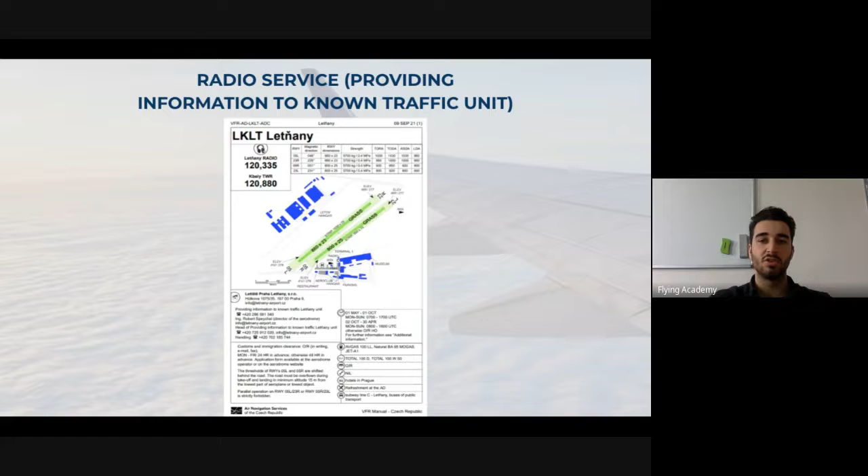The radio service, which is providing information to known traffic unit, is this one: Letnany radio. So what happens? We are in an aerodrome, and this is the aerodrome chart, the configuration of the aerodrome. On top left of the map of the aerodrome chart, you have the frequency, called Letnany radio, and the frequency value is 120.335.

Instead, when we are talking about information service, they are called Kunovice Info, for example. Kunovice is the proper name of the aerodrome, but Info is the information service. It means that they are equipped with a meteorological station. This currently, Lima Kilo Kilo Uniform, which is indicated here, is the only one present in our country so far, and no other information service is provided. Most of them are all radio.

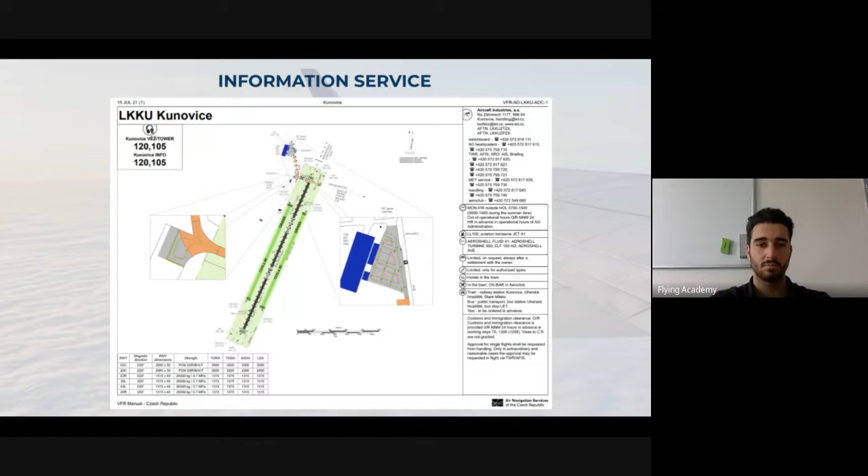So we can try to practice, okay?

Here, guys, we will start to a little bit understand how the communication is established in an uncontrolled aerodrome. We start from the first contact, which we require, and then we will go ahead going over basically all the rest, such as taxiing, so we request to taxi. Then we will see how do we cross a runway. Then we will see after landing, how do we taxi out of the runway, and what are the standard phraseologies. Then we will see how to backtrack a runway. So many types of operation will be faced in this class. For now, let's stick to the basics first.

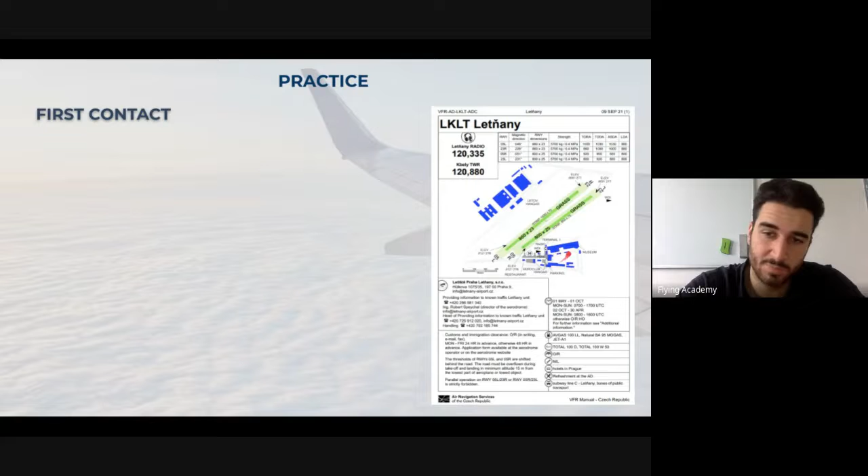So the first thing that we have to do is establish our first contact. Imagine, guys, we are somewhere parked with our aircraft in this aerodrome, and we have to establish our first contact. So what are we going to establish? What are we going to say?

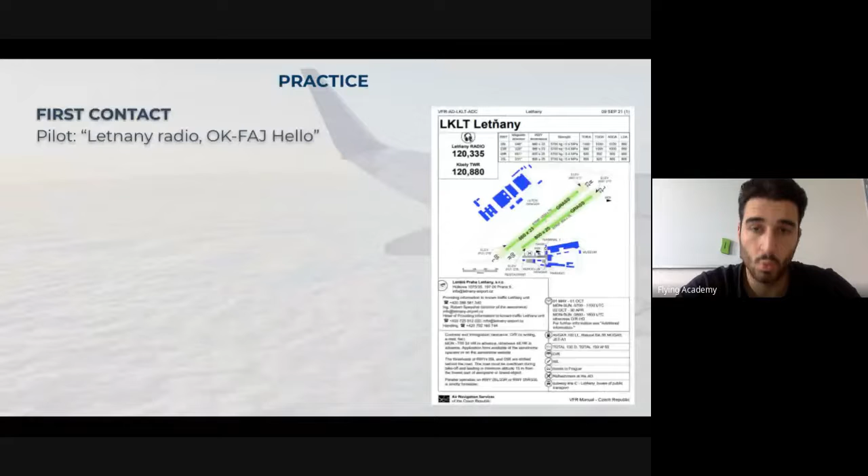First of all, we have to report to the unit which is called Letnany radio, in this case. We have to say who we are calling, who we are, and then establish hello or good day. So we report, we say politely hello. Why? Because we are preparing them that we are going to transmit them a message. Usually, we do not jump into the communication straight saying what we need to say. We first, at the first contact, say politely good day or hello, so we can prepare them.

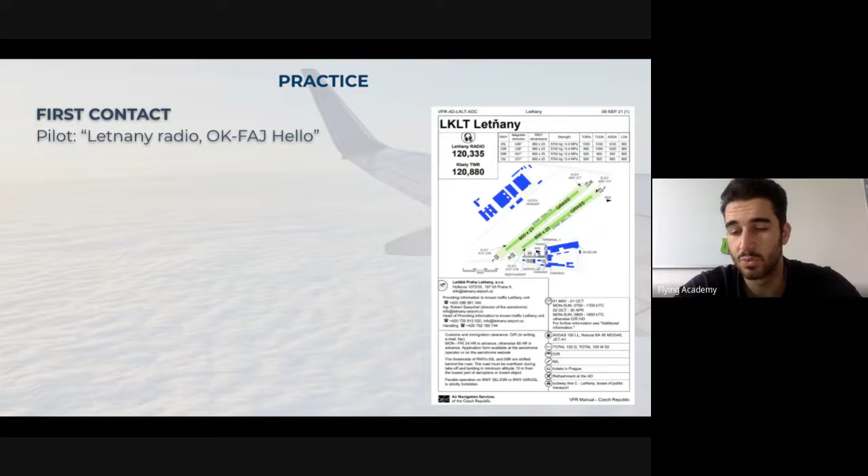The controller will tell you hello back, and he will let you pass your message. So he will tell you, pass your message. He knows you have to transmit something, but what? He still doesn't know, so you will have to report it to him.

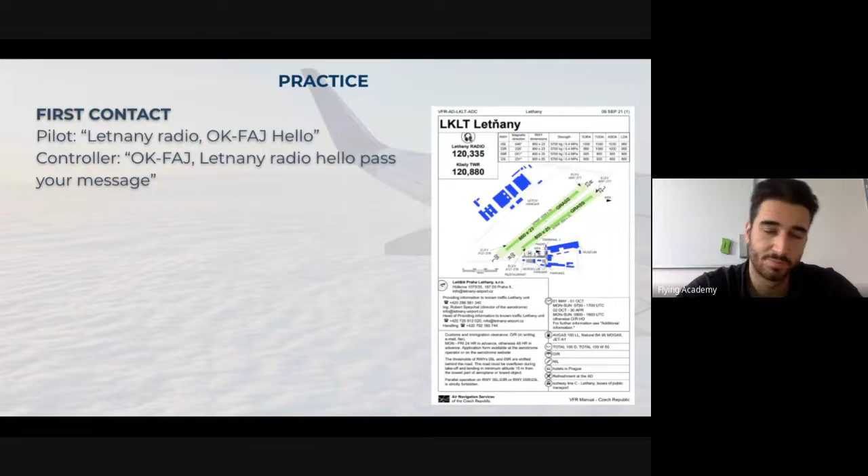So what are we gonna say? Pilot will say: Cessna 152, close to refueling station, 2 persons on board, pilot in command, the name of the pilot in command, and then request departure information via Mike point. So what's happening in this circumstance?

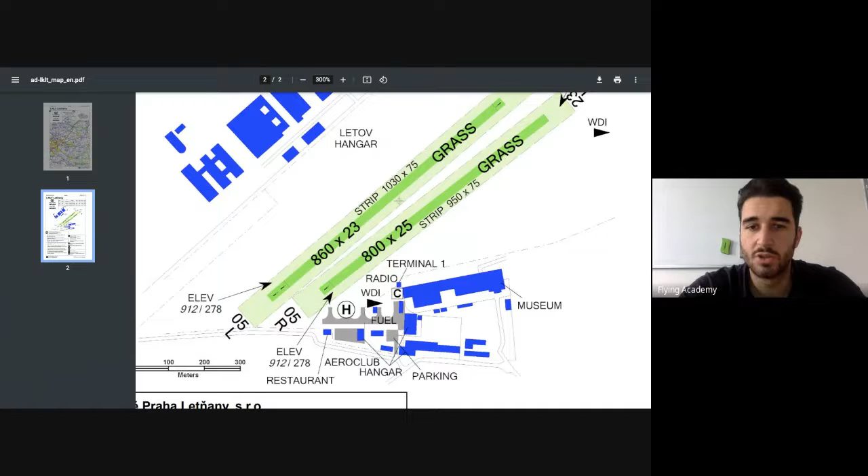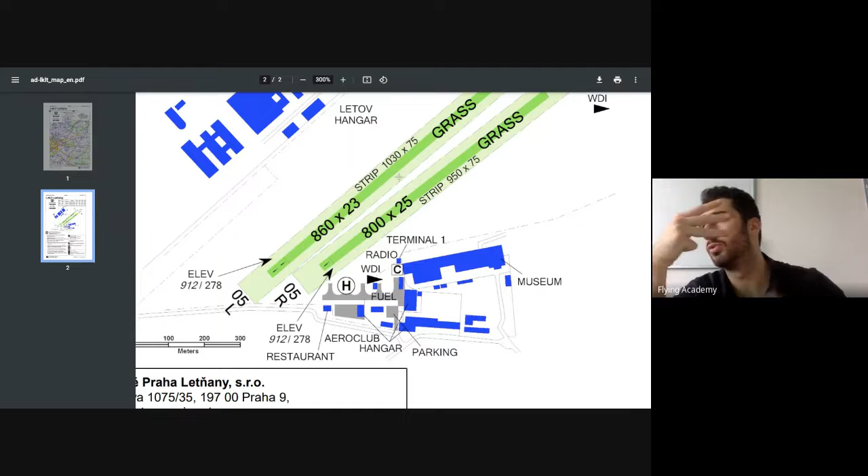So what's happening here? We are reporting, first of all, hello, and then we say Cessna 152, so always the 3W rule: who we are, what we want, correction, where we are, and what we want. So 3W rule, guys, remember it always.

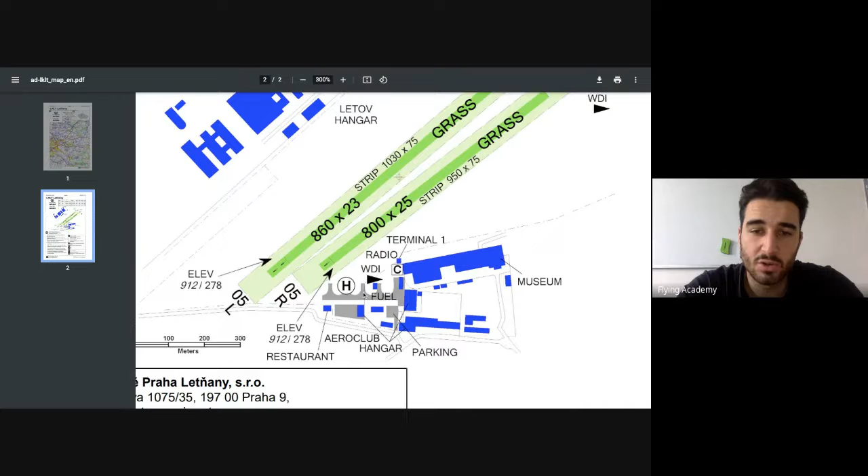So, what do I report? Let's say I'm here, close to the refueling station. I am located here on the paved side. The gray part is the paved side. And then here you have the 2 runways, 05 right and 05 left, or 23 left and 23 right. Here you have the terminal, then the tower, and then some other buildings that are around the aerodrome.

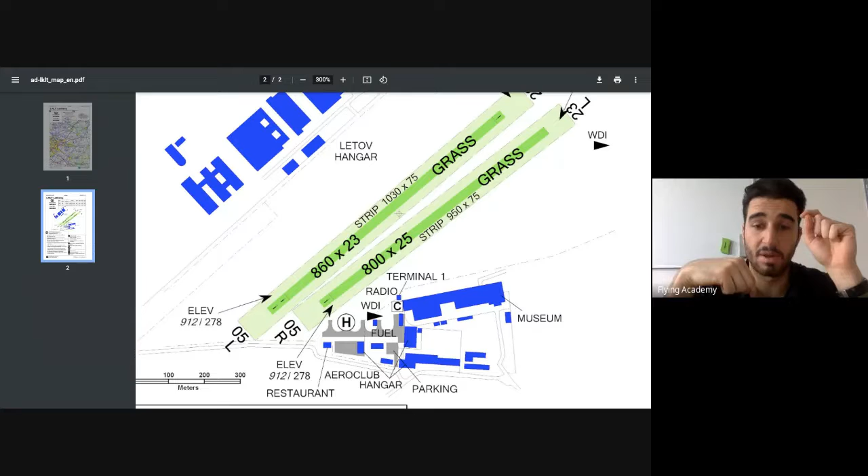So now what happens? You report who you are, Cessna 152 in this position, 2 persons on board, pilot in command, and you will have to say the name of the pilot in command. What does this mean? That you are reporting who you are. So, I'm a Cessna 152, that's my type of aircraft. I have 2 persons on board, it means that it's me, the pilot in command, plus someone else. And third, the name of the pilot in command.

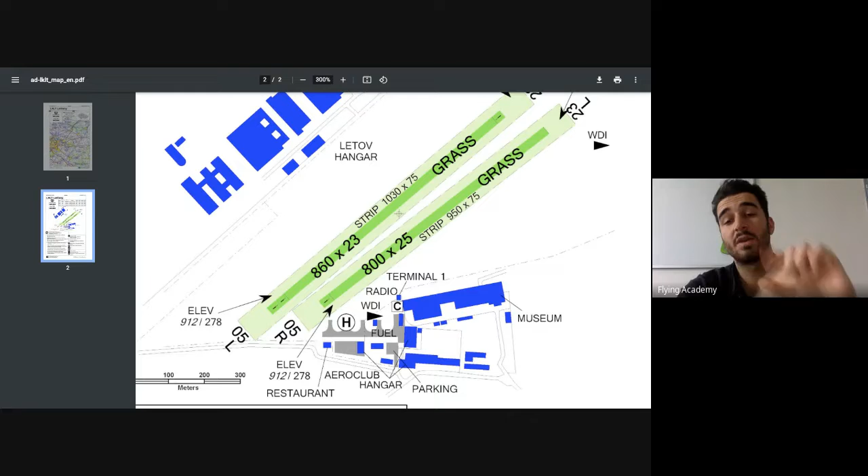So, the name of the pilot in command has to be usually spelled in ICAO alphabet. So, for example, Mayank, can you please spell in ICAO alphabet your name?

You can unmute yourself if you want. Yeah, so Mike Alpha, Yankee Alpha, November Kilo. Okay, very good.

Deksha, can you spell your name? Delta Echo Kilo... Sierra... then Hotel Alpha. Very good, amazing.

You are already guys familiar with the ICAO alphabet. I'm really happy about that. Very good. Muhafiz, can you do the same, please? Yeah.

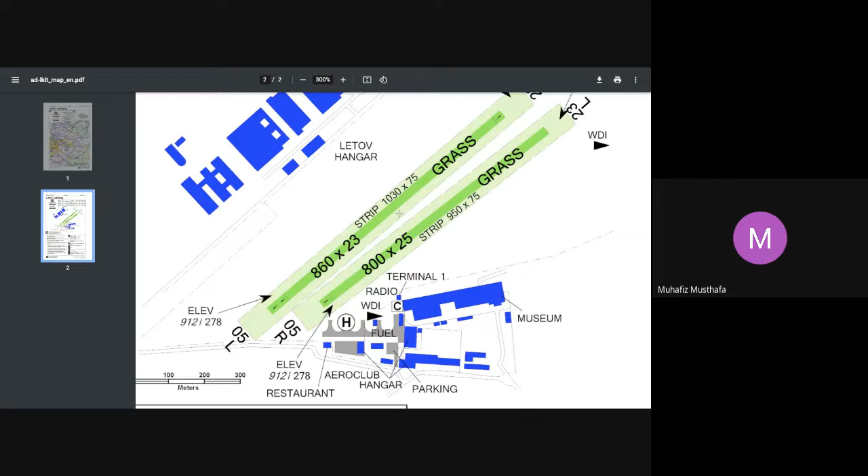Mike Uniform Hotel Alpha Foxtrot India Zulu. Very good, amazing. Okay, guys, that's already a big step. The first thing that you have to do before starting flying: get familiar with this alphabet.

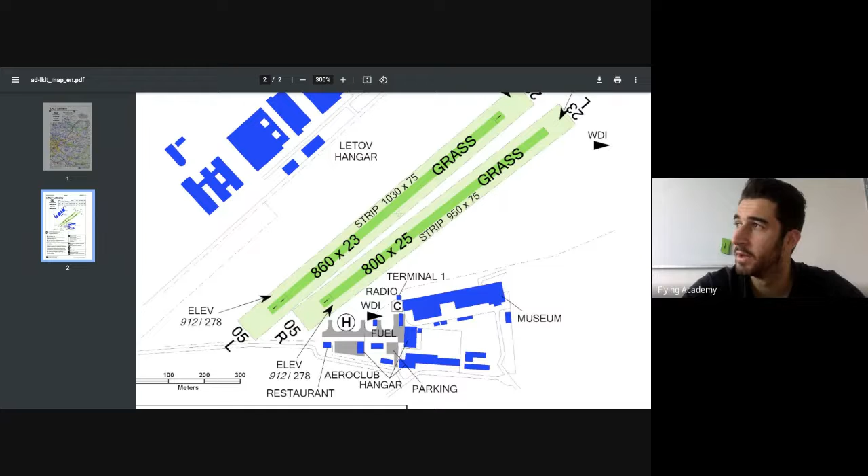Sometimes, maybe you will not fly in the same country you come from, and the controller will not understand your name. It's normal; it happened to me very often. As they do not understand your name, they ask you, can you please spell the name of the pilot in command? So you have to spell letter by letter, and in our case, we have to spell letter by letter in the ICAO alphabet, okay?

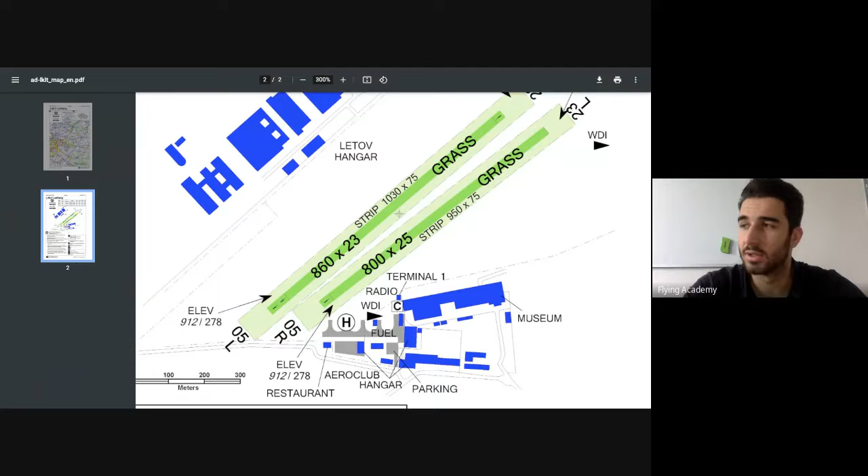Once you report the name of the pilot in command, you will state where you are. We are currently located close to the refueling station. And then we never have to forget: what do we want? Why are we calling these guys and establishing communication? Because we want to depart and leave this airspace from Mike Point in this case.

It means that they have to be aware that we want departure information, because we are in a radio uncontrolled aerodrome. So we want information for our departure via Mike Point, which is this point. Our aerodrome is here, this one. So what we will do is just take off and proceed to this Mike Point. That's our intention.

Okay, the controller now understood what we wanted and he's going to answer us. We requested the departure information, so he will give us the information we require. Oscar Kilo Foxtrot Alpha Juliet, Letňany Radio, runway in use 23, right-hand traffic circuit, not above 2,000 feet, QNH 1010.

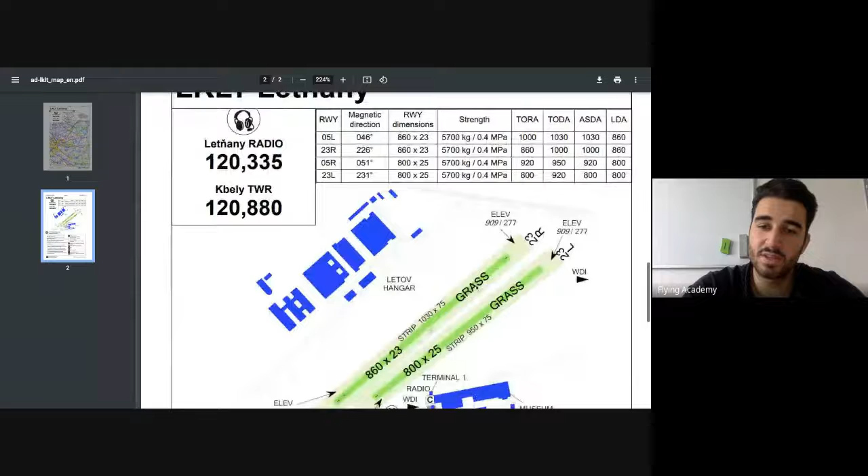So, what does this mean? First of all, runway in use is 23. It means that the wind is coming from the west, southwest. So the runway in use is 23, this one. It means that the pilot will have to taxi from this point all the way to the holding point of this runway, without entering yet, obviously.

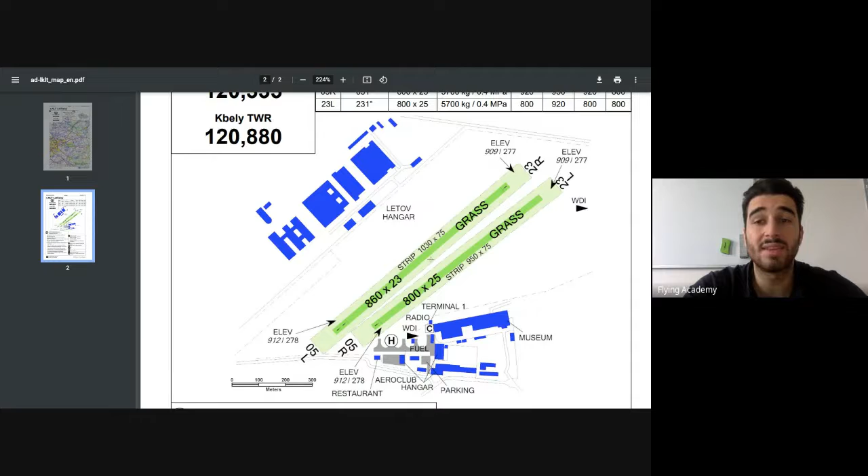Then it says right-hand traffic pattern. It means that if I want to stay on my traffic pattern, I have to take a right turn. If this is runway 23, I have to go to the right, so north of the airfield. And this is the direction of my traffic pattern. Understood?

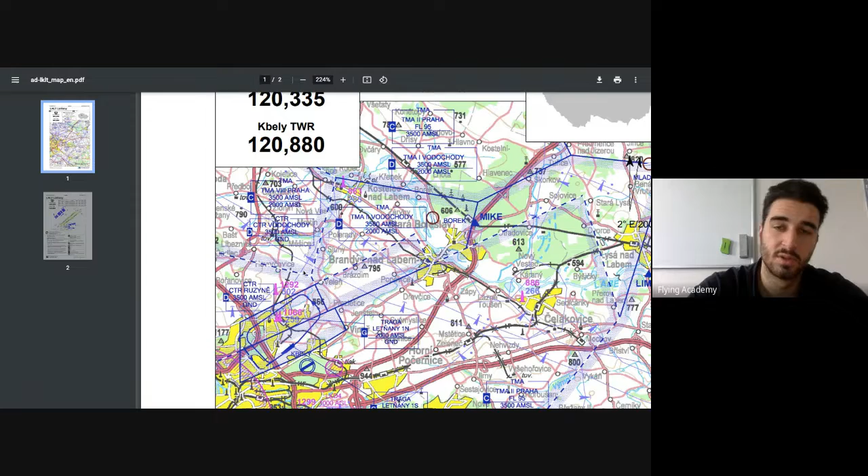Then it says do not climb above 2,000 feet, because above 2,000 feet there is another airspace which we cannot enter. And it also gives the QNH, which in this case is 1010. Okay?

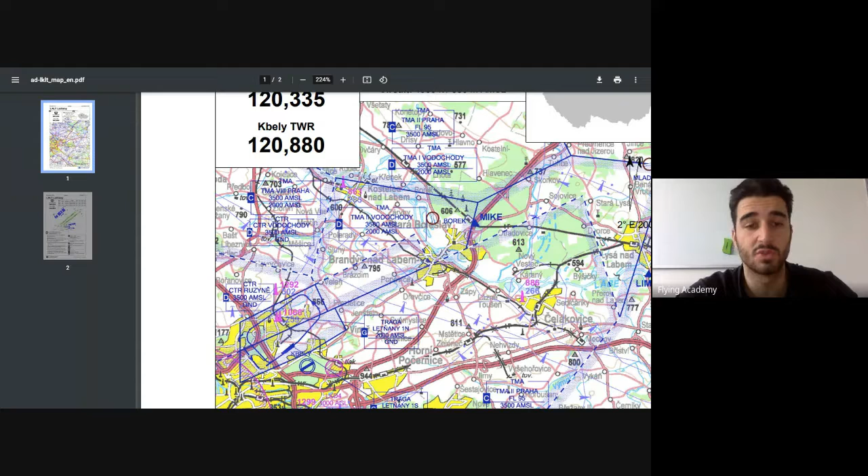Then the pilot, after he receives all this information, has to acknowledge it: runway in use 23, right-hand traffic circuit, not above 2,000 feet, QNH 1010. So he basically repeats everything that has been told to us. In aviation, guys, communication most of the time is just repeating what they are saying to you. Once you understand this, you will be a little more at ease with the communication procedures.

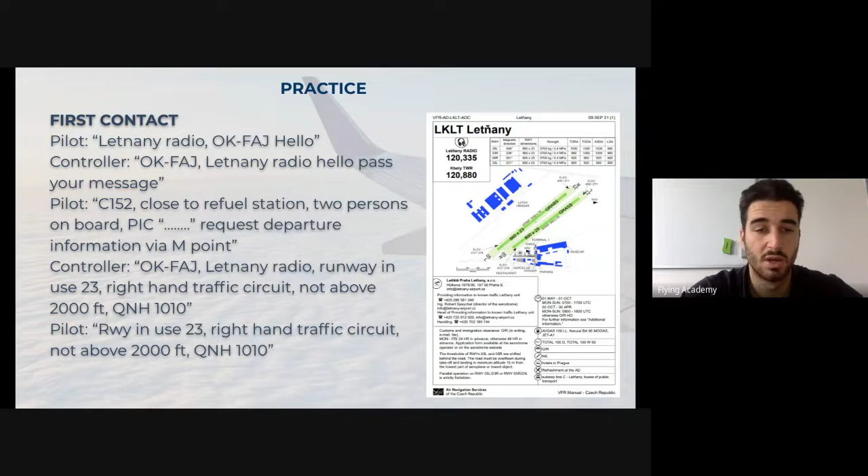Okay, understood until here, or do you have any question? Okay. So now it's time to practice. Taxi. The pilot, as we said, wants to taxi to runway 23. From this position, he wants to follow this arrow and reach runway 23 left.

Now, in some aerodromes, there is no taxi procedure published. What does this mean? That we do not have any taxi path defined on the aerodrome ground. In some others, we do, and I have some examples here. Just give me a second.

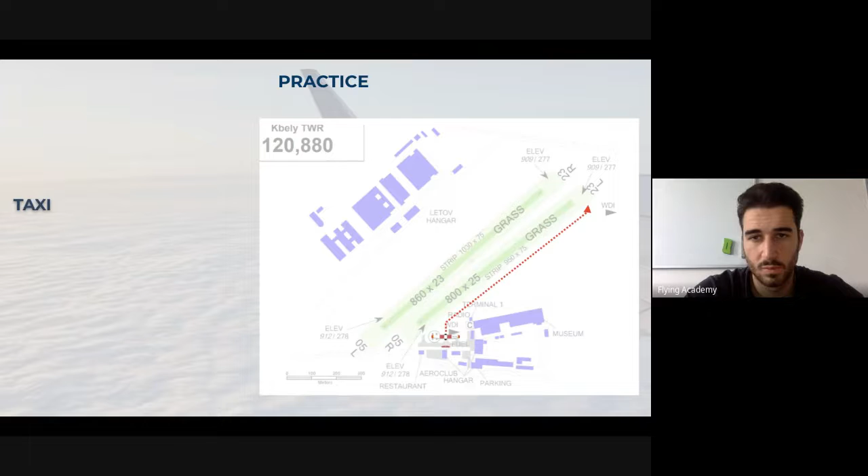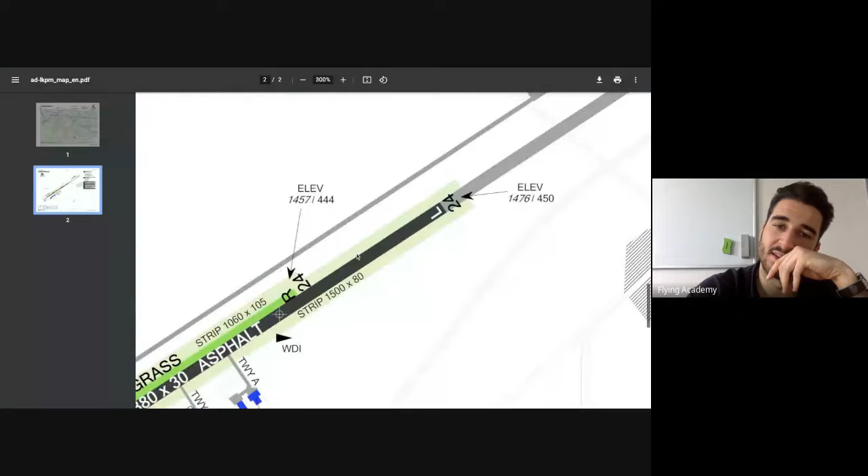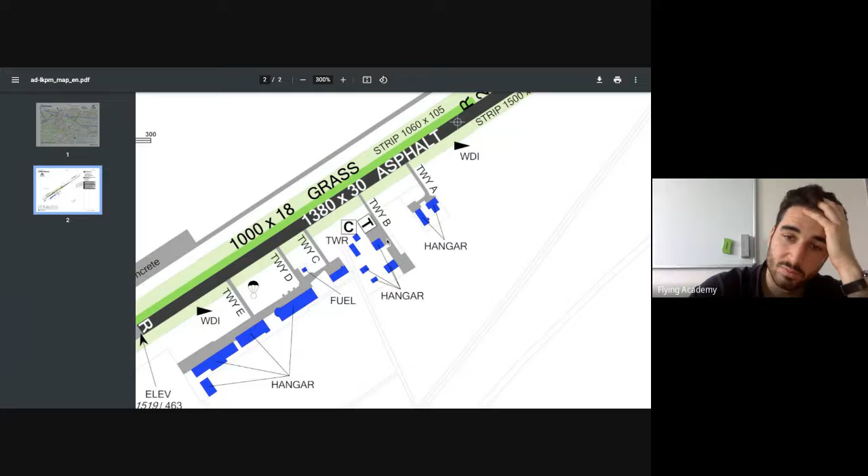So in this case, you see, guys, runway 06 R stands for right, and 24 L, L stands for left. This is the asphalt runway. Then we have the so-called taxiways. Taxiways have different names: Alpha, Bravo, Charlie, Delta, Echo. These are the taxiways, and they are defined paths.

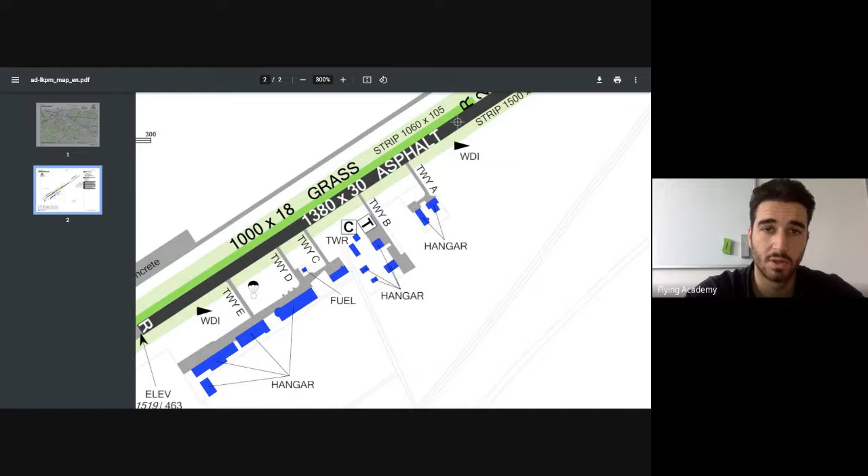The controller will just tell you either copied, Roger, or taxi is clear, meaning the taxiway is clear, there is no traffic and so on. The idea, guys, is that you're just informing them, but you're not requesting anything, because they do not have to give you any authorization. Imagine you are in a public park; no one has to give any authorization. However, it is good to tell them as information.

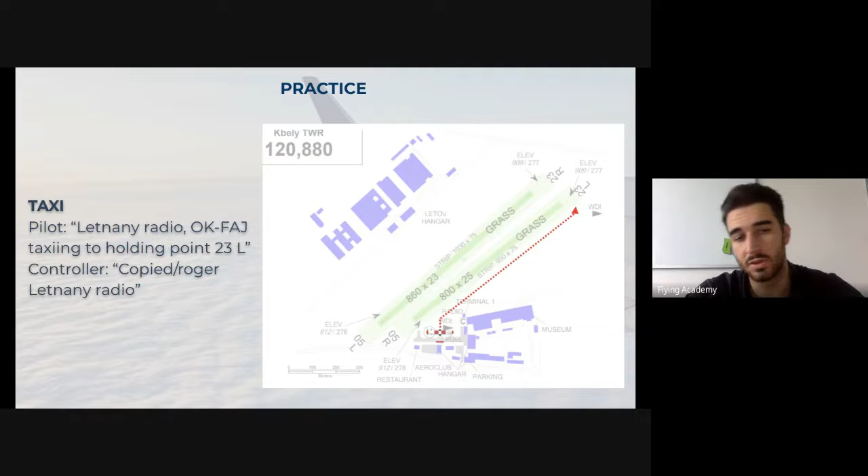In some aerodromes you do not even have to report that you're taxiing, because here no taxi procedure is published; there is no defined place to taxi on the aerodrome chart. However, it's a good habit to tell them that you are taxiing to 23 left. They will tell you, obviously, copied or Roger. Do you remember what Roger means?

Can anyone tell me what Roger means? Yeah, understood, exactly, okay? So, we are taxiing with our airplane to holding point 23, okay? And that's pretty much what happens. After that, we will just request the takeoff clearance. We will just inform them that we will take off, and we will just do the takeoff.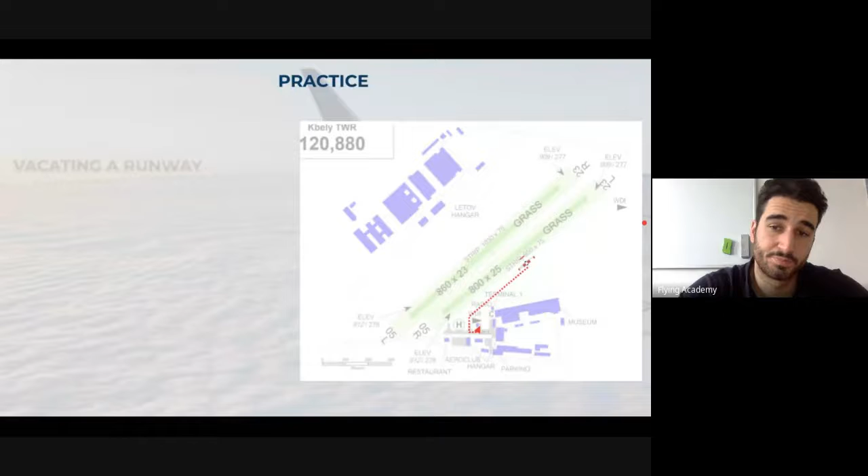Now, whenever we talk about taxi, guys, we are also talking about how to exit the runway, not only when we are going for our departure, but also when we are arriving from our flight, okay? So, whenever we say vacating the runway, it means exit the runway, okay? In an uncontrolled aerodrome, we have to report: Legnani Radio, Oscar Kilo Fox Alpha Juliet, runway 23 left vacated, taxiing to refueling station.

Okay? So we reported to them that the runway 23 left is vacated and that we are taxiing to the refueling station. It is important for you to understand, guys, that it is not mandatory to report the runway 23 left vacated during daytime as per European rule, but it is highly recommended. It is mandatory at night. At night, you have to report the runway vacated. Okay?

And obviously, you tell them taxiing to refueling station. So you are telling them what your intentions are. Okay? The controller will just tell you copied, bye-bye. Okay? Because at that point, guys, you don't need the controller anymore. You are taxiing to the refueling station, switching off the aircraft, and you will refuel the aircraft. But you do not really need the controller anymore for that, okay?

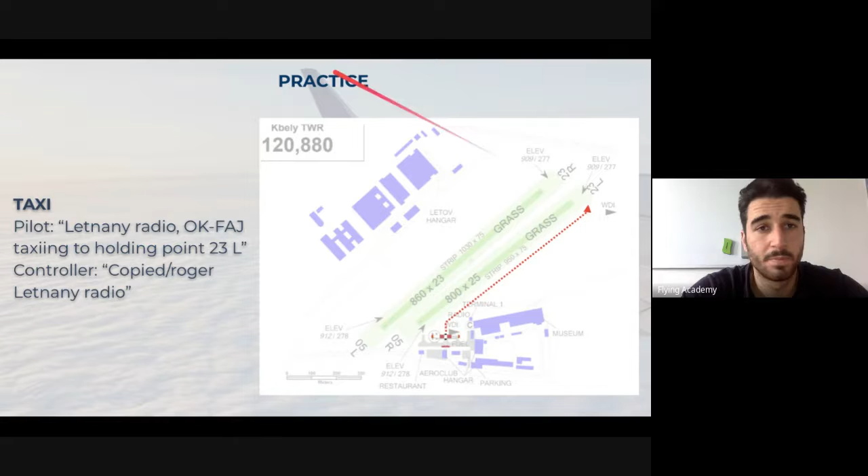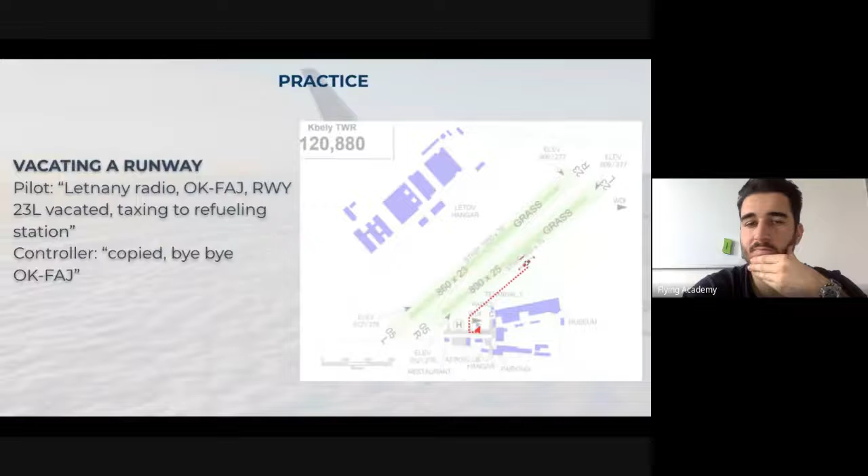What may happen? You may tell them, Letnany Radio, Oscar Kilo Fox Alpha Juliet, runway 23 left vacated, taxiing back to holding point runway 23 left. It means that from this position, okay, in which you vacated the runway, you are going all the way back to this position, okay? Where is the arrow? You see it? Good.

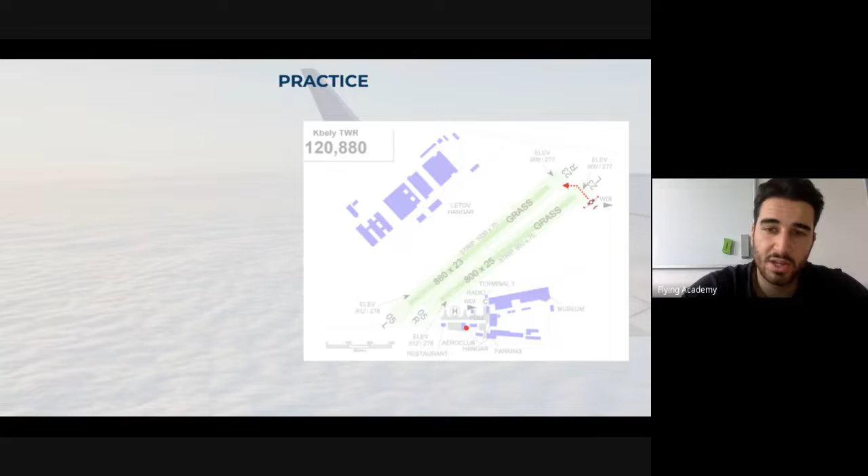So, in some aerodromes, guys, we have two runways, okay? It means that in this case, we have two runways, so 05 left, 05 right, or 23 left, 23 right. So what happens with these runways? If we are coming from here, for example, we were coming from the refueling station, as we said in the previous example, we are taxiing all the way to the 23 left, and now we are waiting there. We do all our procedures and checks, and then we want to take off. But what if we want to take off from 23 right instead of 23 left? It may happen. It often happens.

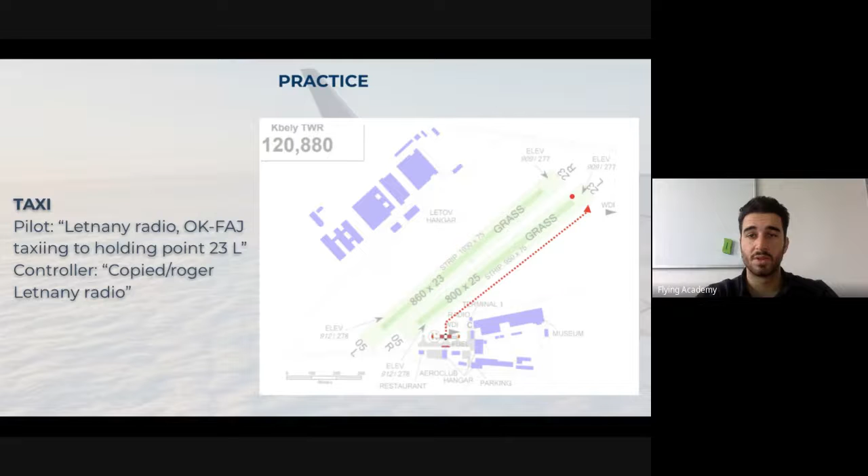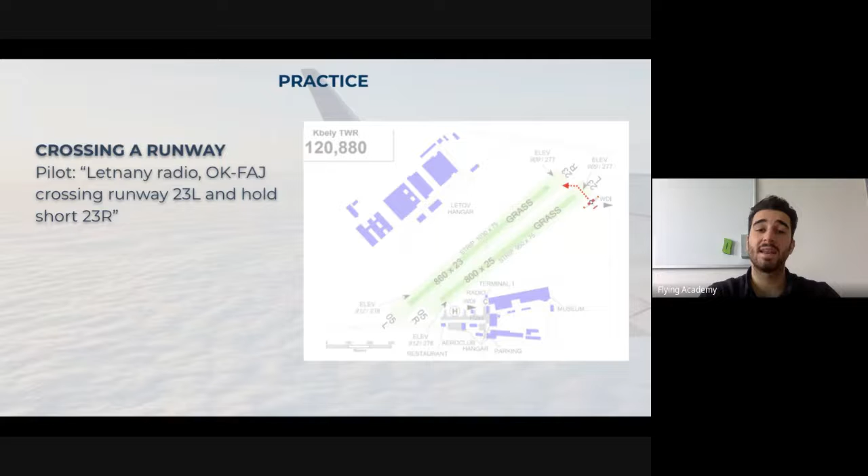So what we have to do is cross the runway, okay? Anytime you are crossing a runway, guys, it is of vital importance that you report it, okay? And the controller will answer you clear, that the runway is clear. So, Letnany Radio, Oscar Kilo Fox Alpha Juliet, crossing runway 23 left and hold short 23 right. It means I am crossing the 23 left perpendicularly and I'm proceeding to 23 right, but I'm not entering 23 right. I'm still holding short. It means I'm just standing by the position before entering the runway.

Very important, guys. Anytime we are specifying the operation on a runway, we have to report the exact runway identification number. Okay? Do not make the mistake: Letnany Radio, Oscar Kilo Fox Alpha Juliet, crossing runway. And what runway? They will ask you which runway. You have to know which runway and you have to report it in the communication. You do not only have to report the runway identification number, but you also have to report whether it's right or left, okay? Because it changes.

It is very important. What if you tell them crossing runway 23 and they don't know which one? And maybe there is an aircraft which is about to land, okay? So that's quite bad. So what they usually answer you is either Roger, or 23 left is clear for crossing. It means the 23 left is clear, there is no obstacle, there is no aircraft landing, no aircraft taking off, you can cross it. Okay?

And they may answer you: Oscar Kilo Fox Alpha Juliet, Letnany radio, hold position, traffic on final. It means that there is a traffic which is landing on final, and they want you to hold your position. They do not want you to enter the runway. They want you to keep your position because there is an aircraft which is landing and it may collide with you.

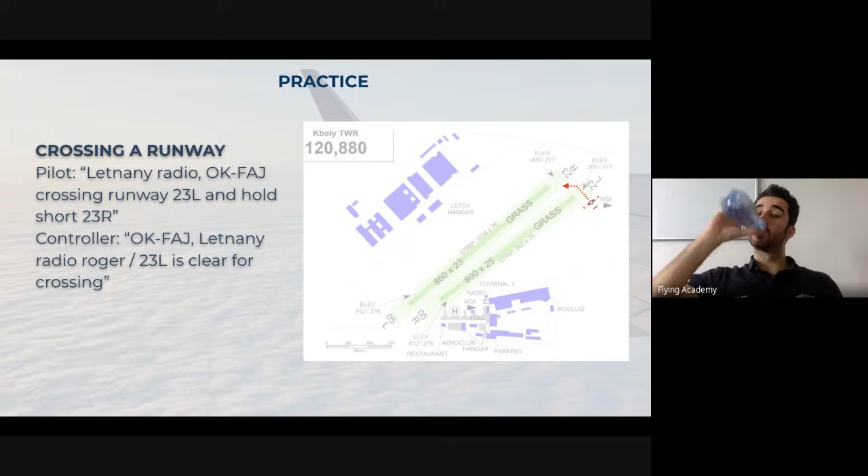Also, question, guys: if Letnany radio, Oscar Kilo Fox Alpha Juliet, runway 23 left, crossing runway 23 left and hold short 23 right, and then they call you and say stand by, what do you do? What do you guys do? First of all, do you answer, Mayank? Okay, no. And then what? You hold the position or you enter the runway and you cross? Okay. Also for you, Muhafiz, you hold? Very good. How about you, Deksha? What do you think?

Okay, exactly. So we do not answer, but we hold the position. It's not that we do not answer but we cross the line. That's bad. We do not do that. Hold the position and do not answer. Eventually, as you also said, Muhafiz, after a while, if they forget about us, we can try to establish communication because it happens so many times to me, guys.

I know it sounds funny, but it happens so many times that I am on the ground most probably, and they call me and say stand by. And I'm there waiting 1, 2, 3 minutes, and no one is calling me anymore, and I have to reestablish contact. What happened? They forgot about me because most probably they had some other traffic or situation to solve. It is normal. It may happen to everyone, so it's not a big deal. Everyone makes small mistakes. Just be aware of it. Okay.

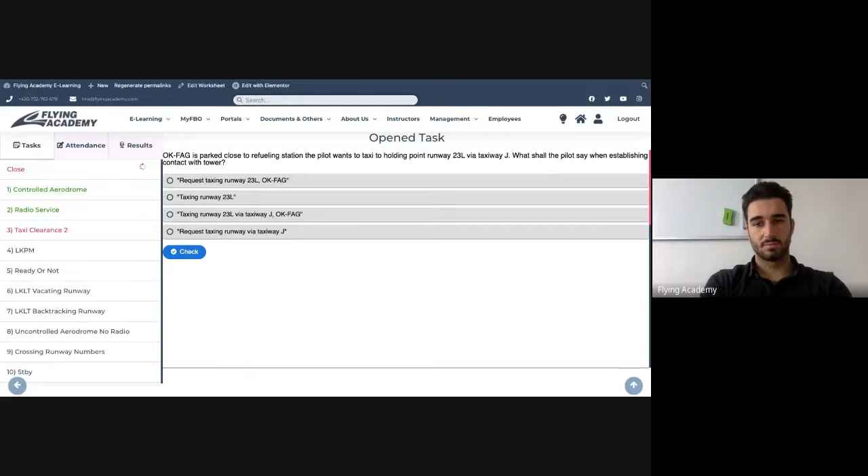Okay, so in this case, we have not specified whether it's a controlled or uncontrolled aerodrome. We assume it's an uncontrolled aerodrome here. So what will we say? Taxiing to runway 23 left via taxiway Juliet, Oscar Kilo Foxtrot Alpha Golf. Okay.

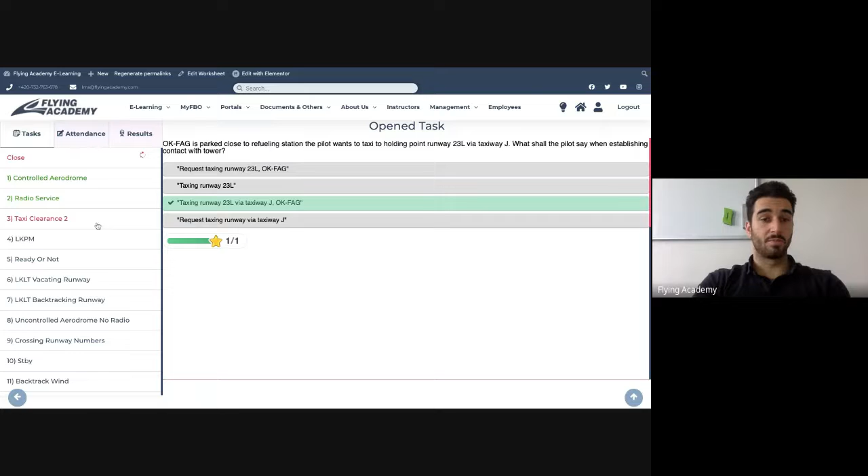We always specify the runway. Because we cannot say request taxiing to runway via Juliet. Or taxiing to runway 23 left, because we do not specify from which side. Or request taxiing to runway 23 left, we cannot do that because here as well we have to specify the Juliet taxiway, and also it is not a controlled aerodrome.

Okay, so next task. Select the taxiway corresponding to the holding points of the runway. Which are the taxiways here corresponding to the holding points? So which taxiways are abeam the runway, guys? Can you name them?

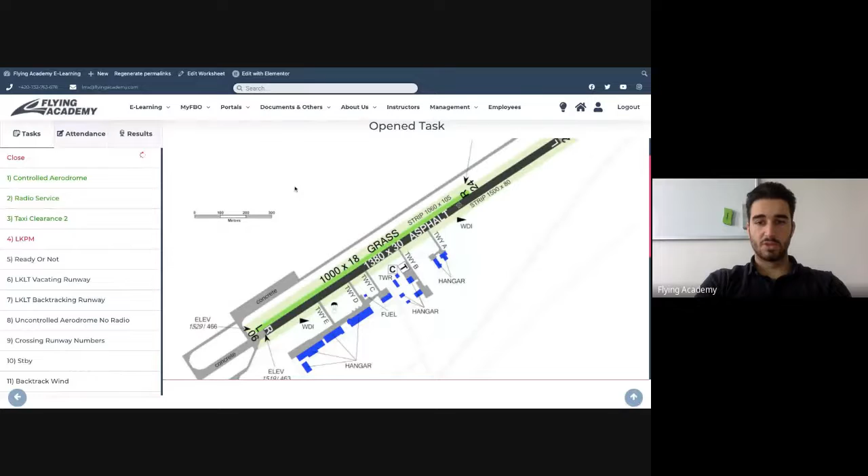Exactly, okay. Here we have defined paths in this aerodrome chart. We have the defined path which will bring us to the runway. These defined paths that guide our movement and directions on ground are called taxiways. In this case, we have 5 taxiways: Alpha, Bravo, Charlie, Delta, Echo. You all agree with me? Wonderful. So if you select them, 1, 2, 3, 4, and 5, they should be correct.

Okay? And these are all so-called holding points. It means that if you proceed with this taxiway, you hold short, okay? You are just about to enter the runways. Okay? Very good.

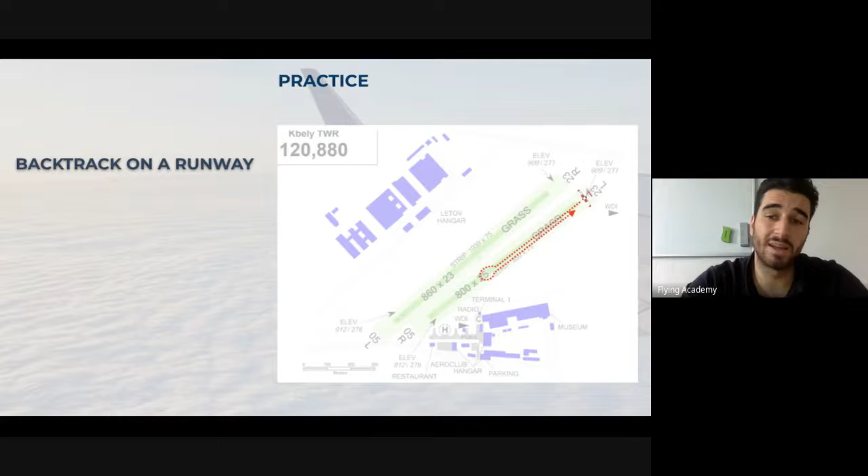Another condition may be if, for example, our parking stand is located somewhere here where the red dot is. We can just backtrack the runway, so we will exit from here, the taxiway, and locate ourselves here. So what happens in this case? The pilot will just advise the radio service that he or she is backtracking the runway. Again, any time we have operations which involve the runways, it is necessary to specify the runway identification number. In this case, 23 left.

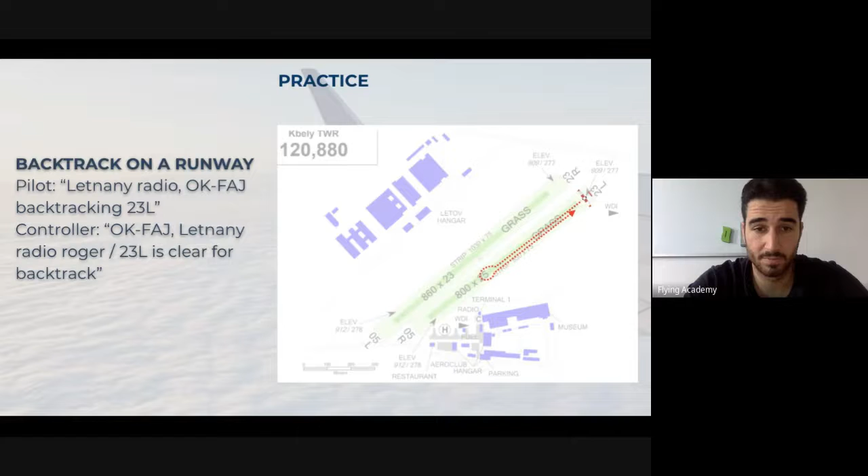So, radio, Oscar Kilo Fox Alpha Juliet, backtracking 23 left. The controller either will tell you Roger, or will call you and say, the 23 left is clear for backtrack. It is necessary that they call you and tell you this. Why? Because you may have traffic on the final. You land and you want to backtrack, but if there is traffic on the final who wants to land on your same runway, it is necessary that you either vacate or the aircraft goes around.

So, in this type of operation, always wait for the answer from the controller. However, if you do not hear any other aircraft on the frequency, you can be sure that there is no other, so you can just advise that you are backtracking runway 23 left and go ahead. If you were on an aerodrome which is controlled, it is necessary instead to request backtrack, and they have to tell you, cleared for backtracking runway 23 left. Instead here, the controller is just giving you information that 23 left is clear and there is no situation that involves other traffic. Is this clear?

It is very important, I stress a lot on the backtrack, guys, because many students get confused on the backtrack. Once it happened to me that we landed on this aerodrome, reached all the way here, and then I told him, okay, now backtrack the runway. He advised the backtrack. What he did, he turned and then he started to take off immediately in the opposite direction. Instead, it is not like that.

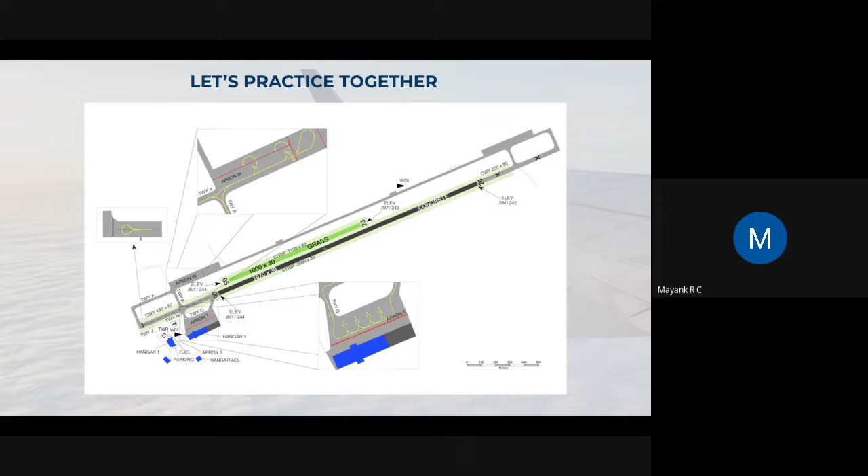Oscar Kilo Golf Alpha Oscar Apron Whiskey via Bravo. Then do you have to repeat QNH? No? No. Okay. So then runway 06. Holding point, you remember? Yeah, holding point runway 06. Okay.

Oscar Kilo Golf Alpha Oscar, Radiște Radio. Taxiways are clear. You are clear to taxi. Okay, so I'm just telling you that they are all clear. There is no traffic, and you can go. Okay, and you just tell me taxiway is clear. Oscar Kilo Golf Alpha Oscar. Okay. Now you are at the holding point taxiway Bravo, and you want to depart. So how do you do that?

Oscar Kilo Golf Alpha Oscar runway 06 departure. Thank you. Departure runway 06. Okay. And I call you and say, Oscar Kilo Golf Alpha Oscar, Radiște Radio, runway 06 is clear. Wind 100 degrees, 13 knots.

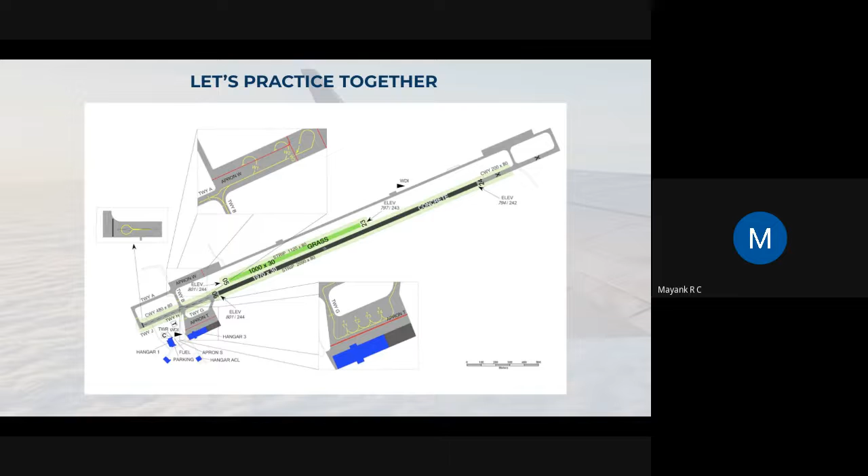Oscar Kilo Golf Alpha Oscar runway 06 clear. Departure. Fantastic. You can also only say clear. That's it. Thank you. Okay. And then you go. That was very good. This one, second one, way better than the first one. Well done. Thank you. It could be better, I guess. No, we'll get better. Don't worry. First time you guys practicing communication. What do you expect? Come on.

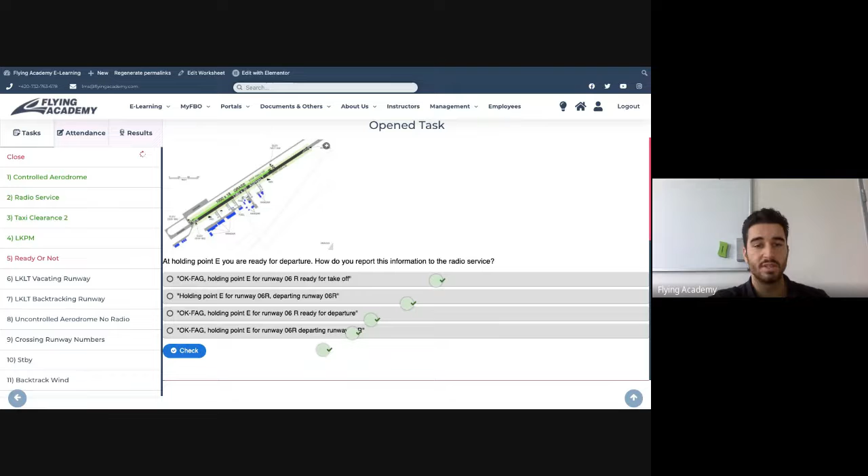So, before going with our last man, which is Diksha, can you guys open worksheets, please? And we can do some of the remaining parts. So please open question number 5, guys. Number 5 says, you are at holding point echo and you are ready for departure, how do you report this information? So, sorry, I will re-upload the worksheet.

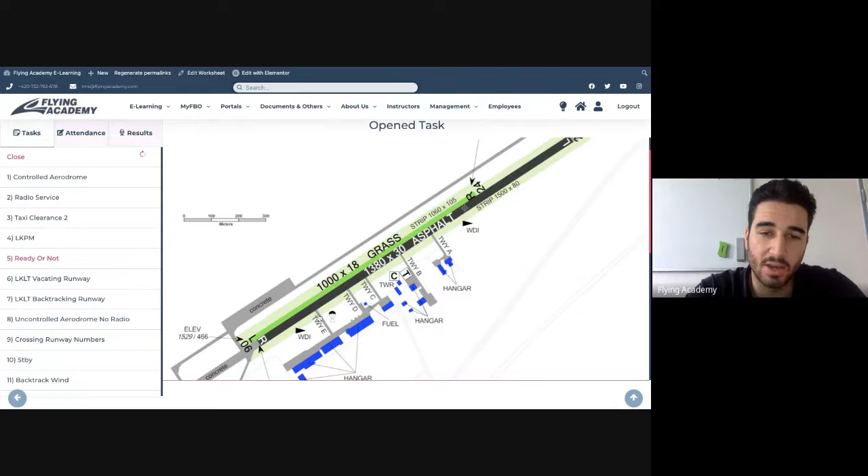So, what's the current situation, guys? You are here, taxiway echo, and you want to depart via runway 06. How do you report this information to the radio service? Oscar Kilo Foxtrot Alpha Golf, holding point echo for runway 06 right, ready for departure. Holding point echo for runway 06 right, departing runway 06 right.

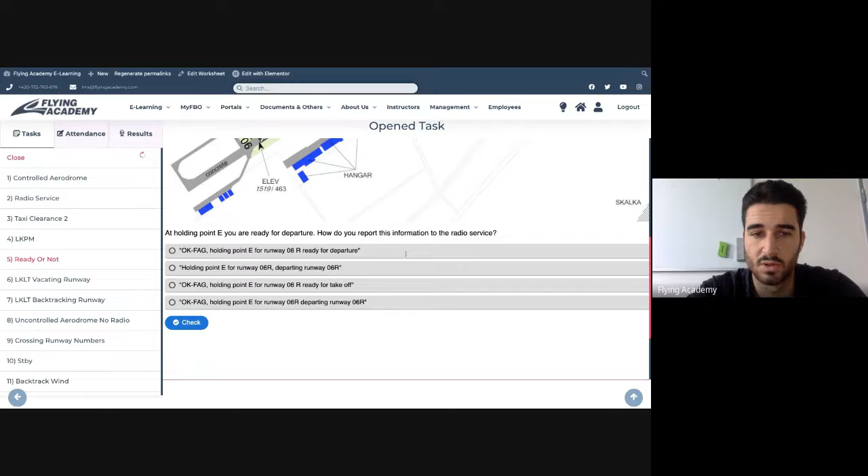Oscar Kilo Foxtrot Alpha Golf, holding point echo for runway 06 right, ready for takeoff. Holding point echo for runway 06 right, departing runway 06 right. You all agree? Diksha, you agree as well? Okay, exactly, guys. So we are in uncontrolled aerodrome. So we just tell them we are holding point here and we are departing, okay?

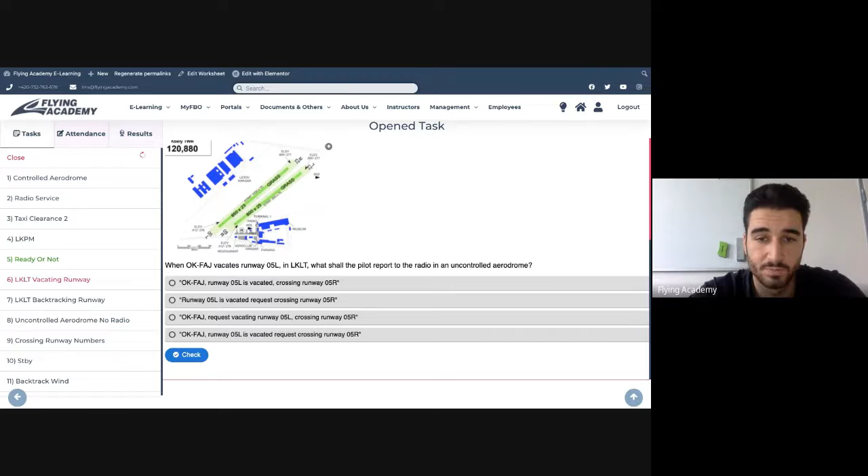So Oscar Kilo Foxtrot Alpha Juliet vacates runway 05 left in Lima Kilo Lima Tango. What shall the pilot report to the radio in an uncontrolled aerodrome? So vacate 05 left, it means that it's here and he vacates it to the right. But he has to cross the runway, because he wants to go to the refueling station. So he needs to cross the runway and then go to the refueling station. How will we report it?

Oscar Kilo Foxtrot Alpha Juliet, runway 05 left is vacated, crossing runway 05 right. Runway 05 left is vacated, request crossing 05 right. Request vacating runway 05 left, crossing runway 05 right. Runway 05 left is vacated, request crossing 05 right. Okay. So you agree with Diksha?

Okay. Guys, we are in uncontrolled aerodrome, right? When do we request in uncontrolled aerodrome, or do we just announce? That's my question to you. We just announce. Exactly. So what's the answer, which is us announcing that we are vacating and then we are crossing? Then eventually the controller in the tower will tell us, no, wait, there is traffic, and he's helping us. But which is the only answer in which no one is requesting anything?

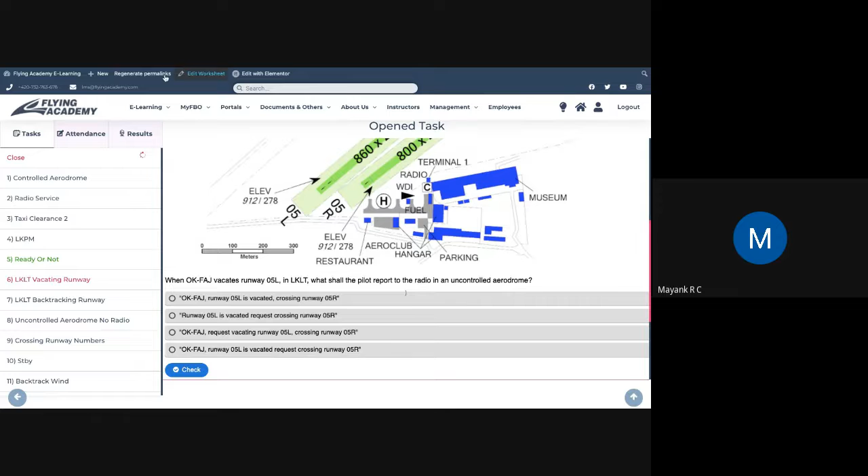Exactly, okay? No, be careful, Mayank. Runway is vacated, request crossing. Okay, be careful. So runway 05 left is vacated, crossing runway 05 right. Okay, be careful.

Same story here. Oscar Kilo Papa Alpha Victor needs to backtrack runway 23 left after landing. What would be the message the pilot shall transmit in the radio frequency? Papa Alpha Victor requests backtrack on runway 23 left. Backtracking on runway 23 left. Oscar Kilo Papa Alpha Victor. Backtracking on runway 23. Backtracking on runway 23 left.

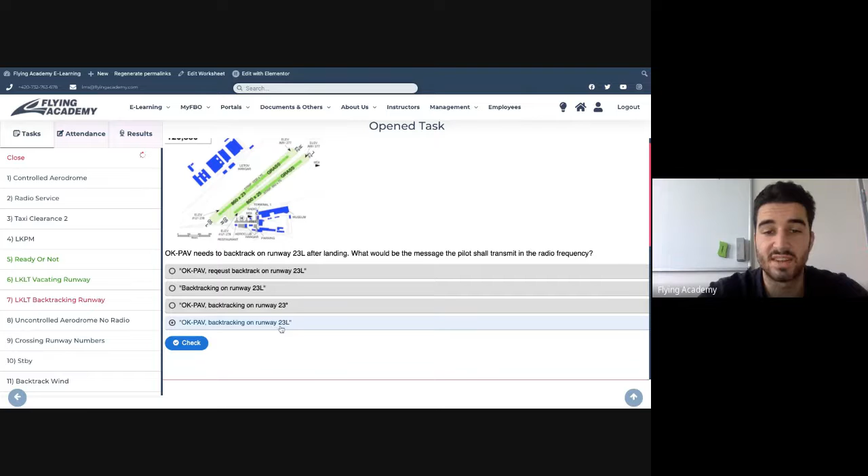Which one is the correct one? So, in this case, okay. But Mayank, if you report backtracking on runway 23 left, how do I know who's calling me? As the controller, let's say you report to me, you are Mayank with Oscar Kilo Papa Alpha Victor, and you tell me backtracking on runway 23 left. How do I know who you are? You understand what I mean? I need to know who's calling me, right? Exactly, then specifying always left. 2-3 is not enough. Okay?

Okay, if a pilot tried to establish contact in uncontrolled aerodrome, but no one is answering on the radio, what shall his or her action be? She should make constant calls reporting his or her position and intention. No action, he shall cancel the flight. She shall establish communication with information en route service and get departure clearance from them. Or he shall establish communication with the closest controlled aerodrome and get departure clearance from them. What do you think should be done, guys?

Exactly, Muhafiz. Exactly. Okay. What's happening here? We cannot call anyone else because the person responsible for our aerodrome is not there. Okay, so we have a radio service, so we cannot call someone else either. It doesn't work like that, either en route or around. We cannot do that. We have to keep communicating and make constant reports. All right. All right, good. Understood?

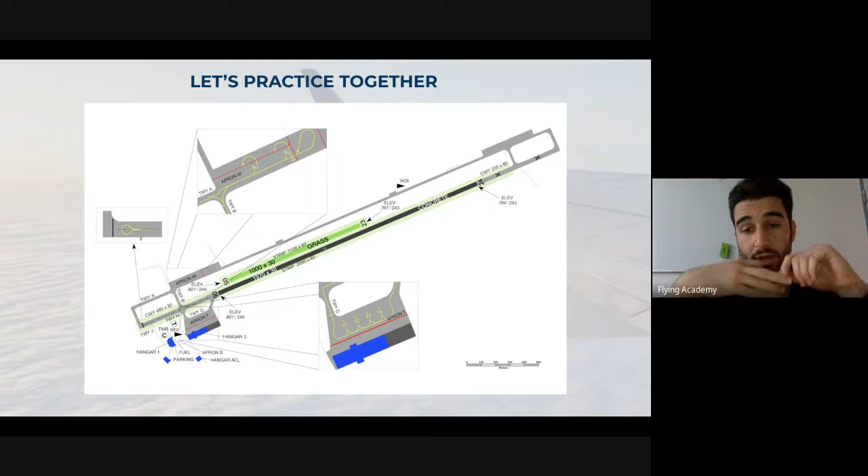And then, why are you calling me? What do you want? Information about the runway, whether it's clear or not. This is called departure information. Departure. Yeah, okay. Information, okay, perfect. Now you try to say it again, okay, but add there your name, okay. You have to say pilot in command, Deksha, okay, no need to spell it, just add it on who you are, okay. So try again, who you are? Oscar Kilo Hotel Alpha Delta. And then departure information. Pilot in command — you have to tell me the pilot in command because who you are. Pilot in command. Okay, then departure information.

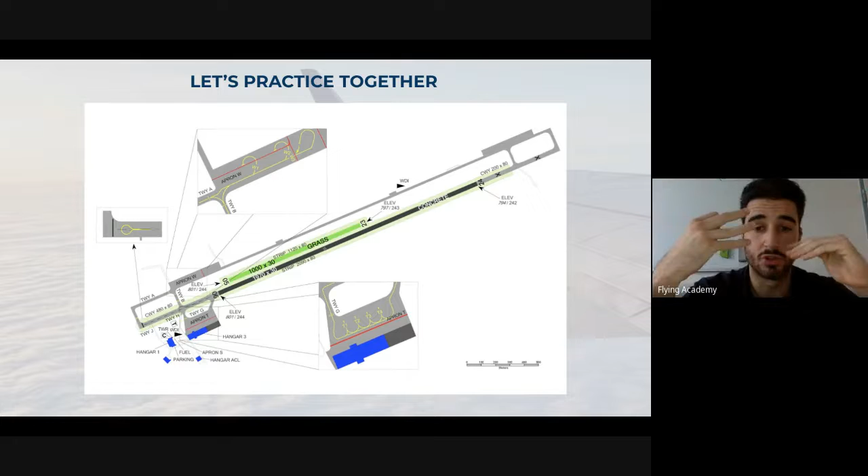And then departure information. You have to go like methodology. You have to use these three: who you are, where you are, what you want. Who you are, where you are, what you want. If you guys use this, you never make mistakes, if you are able to use this thing.

So try again and establish communication again with me, please. From the first, no need to say hello. Just go ahead like we said hello, hello, okay? And now you have to pass your message.

Then what I have to do? Okay, but we have to go with the scale, right? Who we are, what we want, right? Correction: who we are, where we are, what we want. Okay, that's the scale. You agree with me? Yeah.

Okay, great. So try to use it. Who are you, Deksha? What's your call sign? Oscar Kilo Hotel Alpha Delta. Where are you? Upon Tango. Very good. And what do you want from me? Why you call me? Departure information. Very good. You see, if you use this scale, you never go wrong.

Oscar Kilo Hotel Alpha Delta, apron Tango, holding point runway 06. Yes, but you have to tell me that you're taxiing via taxiway Tango or taxiway Golf, because otherwise I don't know. Yeah, so try again. It will be, I'll tell you what you have to say.

Oscar Kilo Hotel Alpha Delta at apron Tango, taxiing to holding point runway 06, via taxiway Tango. Okay, I wrote it in the chat for you. Try again.

Oscar Kilo Hotel Alpha Delta, apron Tango, taxiing to runway 06, holding on runway 06, and then holding point 06, runway 06, via taxiway Tango. Very good, very good, you just told me what you are going to do, what is your intention, what way you are going to take.

Okay, yeah, perfect. Oscar Kilo Hotel Alpha Delta, Radishte Radio, copied, taxi is clear. Okay, taxiway is clear, it means it's clear, clean, you can go, you are free. Now your next contact will be to report me that you are departing from runway 06.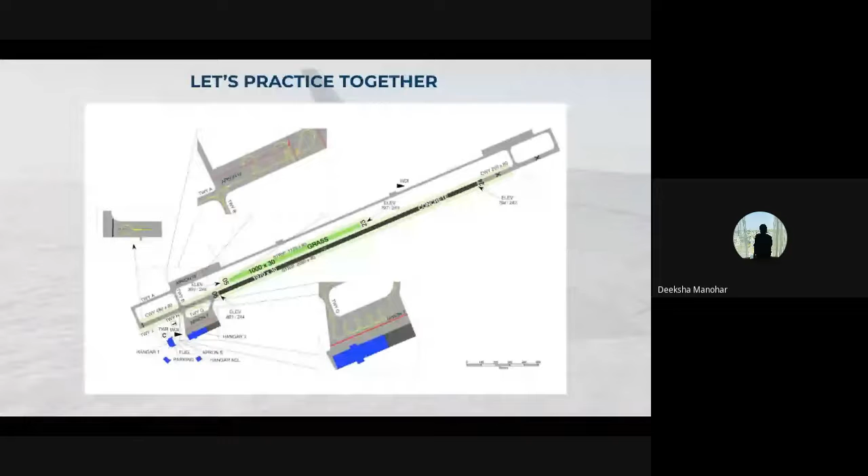Apron Tango. You are not in Apron Tango anymore because you are at the taxiway. You are at the holding point of the runway. Yeah, taxiway 05. No, it's not 05. Taxi via Tango, holding runway 06. Okay, and that's where. And why do you call me? What do you want? Departure information on runway. You already have the departure information. Why do you call me? What do you want to do?

To cross runway 06. You want to cross runway 06 to do what? Take off on runway 05. You want to go to runway 05? I didn't know. No, just taking your information whether the runway is clear or not. You want to depart, okay? You want to go now. You are there, you are ready to go, right? Only if it's clear. Say again? Only if the runway is clear.

Yeah, but if you tell me that you want to depart from runway 06, I can tell you it's clear or it's busy, okay? But you have to tell me that you want to go, otherwise you will never be able to go. So again, who, where, and what? Who are you? Oscar Kilo Hotel Alpha Delta. Where are you? Runway 06 left hand traffic pattern. You're not in the left hand traffic pattern. You are in taxiway Tango, holding point. You told me correctly before. Holding point 06, right? You are just holding before the runway, okay?

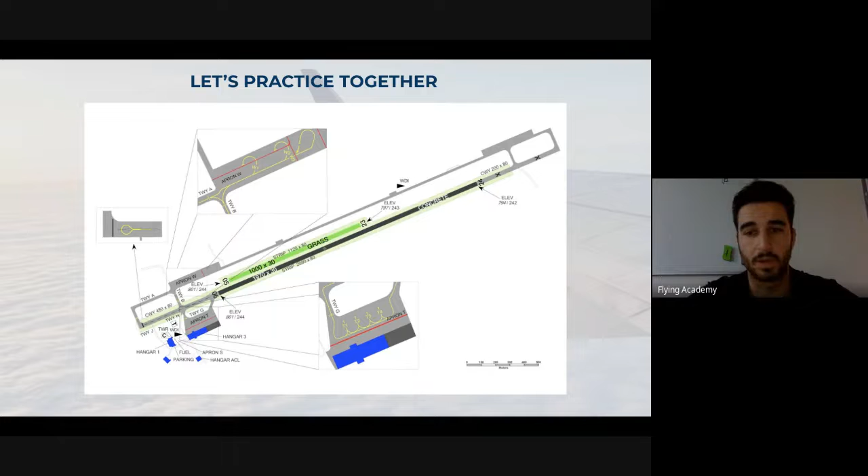Oscar Kilo Hotel Alpha Delta, departure runway 06. Negative, Oscar Kilo Hotel Alpha Delta. Oscar Kilo Hotel Alpha Delta, hold position runway 06. Correction, hold position. Oscar Kilo Hotel Alpha Delta, holding position. Fantastic. You see? Very easy. I tell you hold position, you hold the position. Okay?

Oscar Kilo Hotel Alpha Delta, runway 06 clear for departure. Wind 060 degrees, 12 knots. Oscar Kilo Hotel Alpha Delta, departure runway 06. Perfect. Good. That's it. Because the wind, you never have to report it. The wind is an information that you keep for yourself.

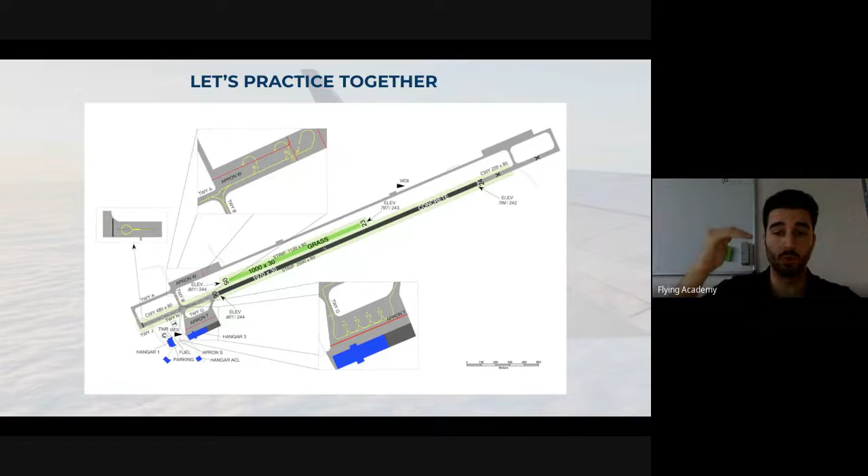Okay. Good. Don't worry. With some exercise, it will get better and better. It's the first time you do it, so no worries. Just always think who you are, where you are, what you want. It's always the same. Who, where, and what. If you use this methodology, you never go wrong. Very good.

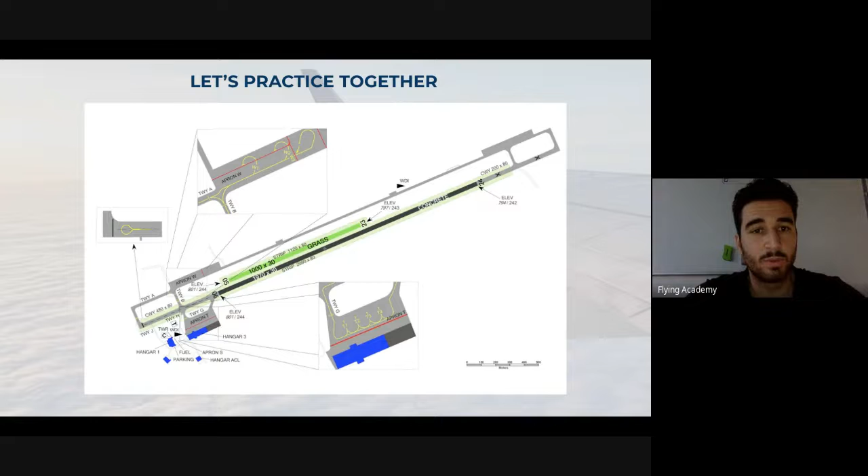So guys, can you please open the worksheets? Do you see my worksheet? Very good. So, question number 9. When crossing a runway, a pilot should always report the runway identification numbers. Is this true or false? So it's true. Exactly, it is true. Why? Every time we are subject to either clearances or information regarding a runway, we always have to report the identification number and letter, whether it's left, right, or center. So this is true.

The following communication between pilot and controller takes place. Pilot: Letnany radio, Oscar Kilo Foxtrot Alpha Golf, holding short runway 05 right, request crossing 05 right and hold short 05 left. Controller: Oscar Kilo Foxtrot Alpha Golf, stand by. What shall be the next answer of the pilot? Roger, no answer, stand by, or Wilco? Roger, I think. Deeksha, what do you think? Deeksha, you agree?

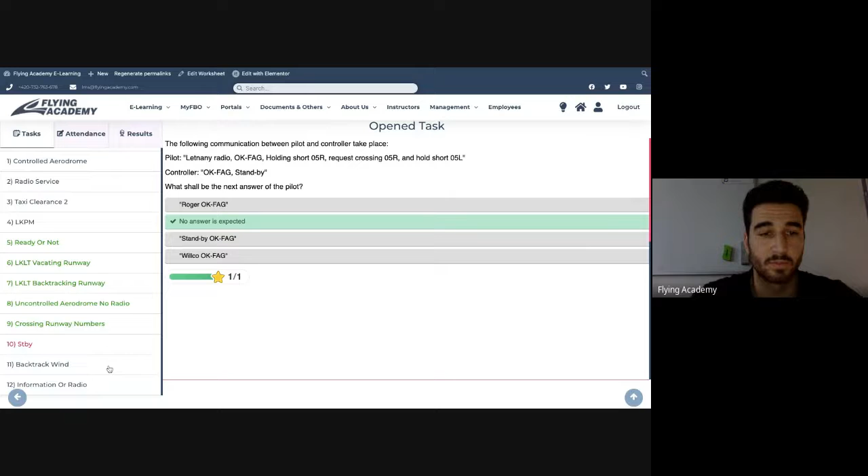So anytime we have the standby call, no answer is expected. We do not have to answer at all because they are busy doing something else and they do not want us to interrupt the frequency. Or maybe there is another aircraft which has to be cleared either for landing, takeoff, or taxi. So in this case, no answer is expected. Is it clear for everyone?

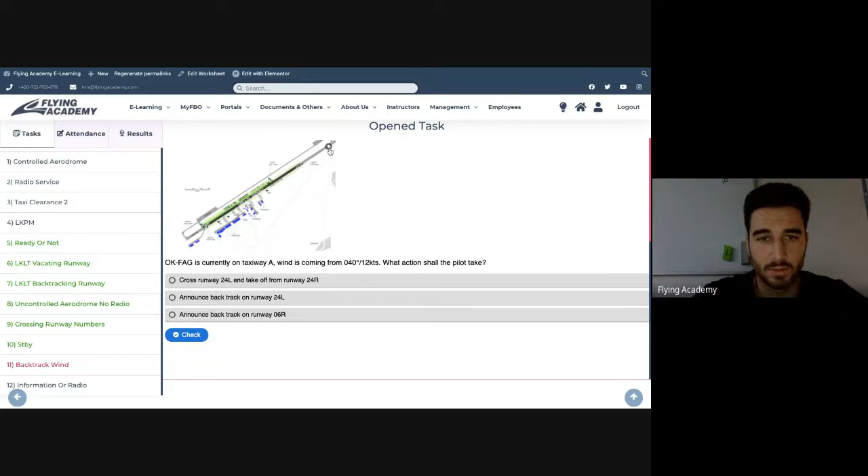Oscar Kilo Foxtrot Alpha Golf is currently on taxiway Alpha. Wind is coming from 040 degrees, 12 knots. What action shall the pilot take? Cross runway 24 left and take off from runway 24 right, announce backtrack on runway 24 left, or announce backtrack on runway 06 right. So here is the situation: the pilot is on taxiway Alpha, and the wind is coming from 040 degrees. So from which runway do we take off, 06 or 24?

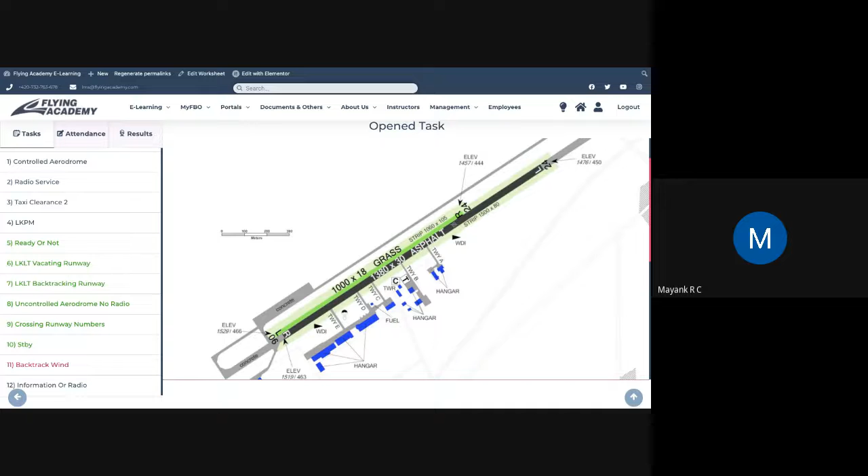What do you guys think? So wind is coming from 040 degrees. Then it's 06. Very good. You agree, Deeksha, as well? Yeah, opposite to the wind direction. Very good. We always take off in headwind.

So in this case, what shall we do? Backtrack on runway 24 and take off from runway 24, backtrack on runway 06 right and take off from 06 right, or cross 24 left and take off from the grass runway 24 right? Very good, exactly. So we should announce backtrack on runway 06 right, because we have to take off from runway 06 right. You all agree, guys? Very good.

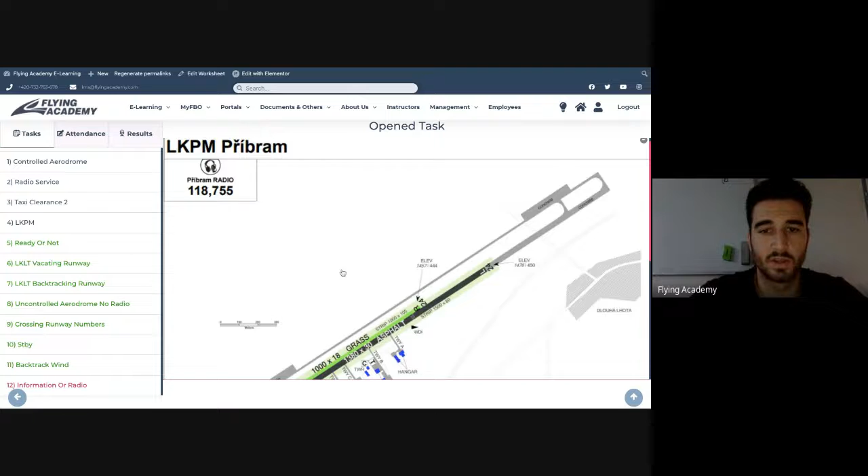The aerodrome shown in the image above has an information service. Is this true or false? Is it radio or information service, guys? It's radio, so it will be false. Exactly, it's false, because this is a radio service. It's not information, so no meteorological system is shown. So it's false. Very good.